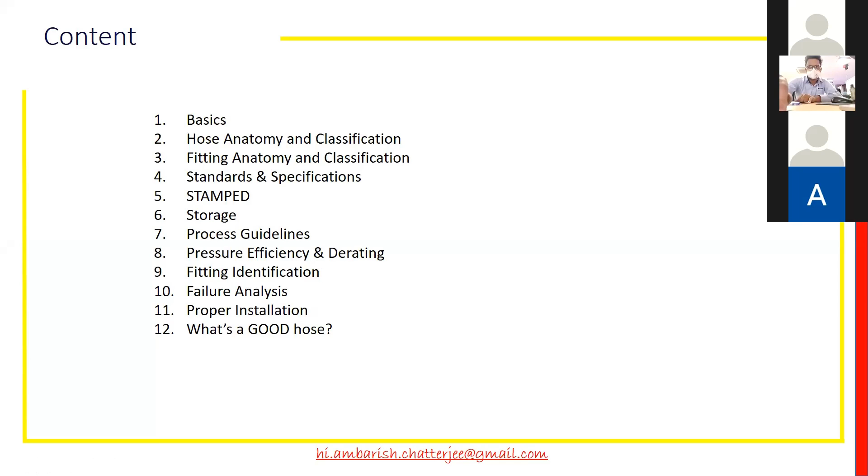Hose can be classified basically into two broad classifications. One is the fluid power hoses, which is used in hydraulic circuits and pneumatic circuits, and the other is the fluid transfer hoses, or generally known as industrial hoses, which includes air, water, chemical, steam, fuel dispensing, refueling, suction discharge, and all those. Now, in this session, we will focus on fluid power hoses, and to that extent, mainly hydraulic hoses.

First we go into the... is there some disturbance there? It seems so. Can everyone please mute yourself? Thank you. I would request every participant to please mute and to please participate actively in this. Thank you.

So first we go into the hose anatomy. What is there in the hose? Basically, there are three main components in a hose: one is the inner tube, the other is the outer cover, and the third is the reinforcement.

The inner tube should be resistant to the oil or whatever media is flowing through the hose. The outer cover should resist external aberrations like weather, fire, ozone, etc. And the reinforcement is the most important part of the hose. Not that others are not important, but this is the most important, because depending on what reinforcement is given, the pressure rating of the hose is determined.

Let me tell you, the tube and the cover do not contribute anything towards the pressure rating of the hose, the pressure withstanding capacity of the hose. So these are the three main components: inner tube, reinforcement, and outer cover.

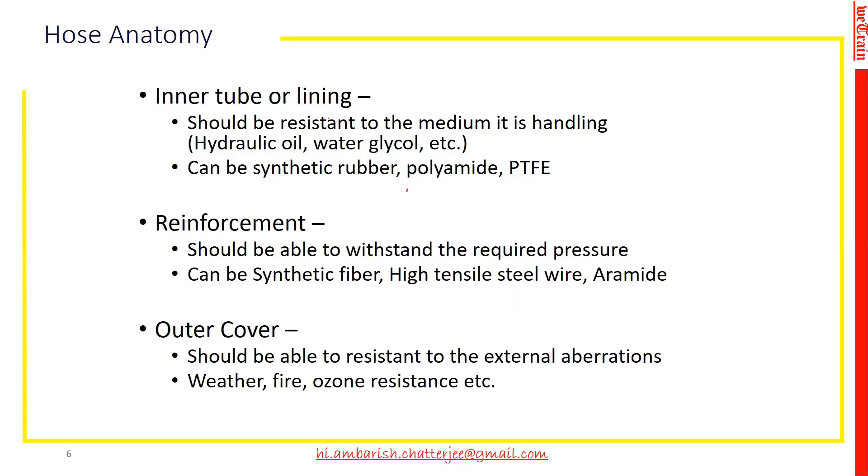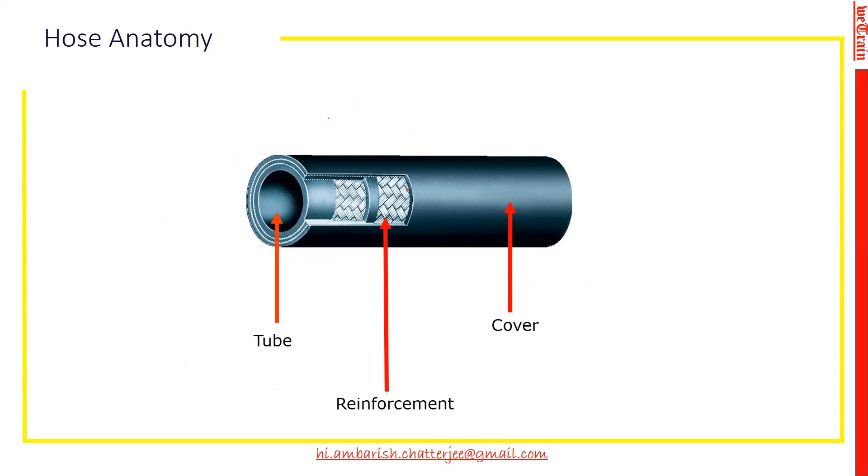There are others. Basically this is called the construction of the hose, where you have got three parts, and construction-wise, if you classify the hoses, then there are braided reinforcement, which is mainly meant for low and medium pressure, the spiral reinforcement, which is meant for high pressure, and helical reinforcement, where there's a helical wire embedded between the walls of the hose, which takes care of suction. During suction, there should not be any collapse in the hose. So this helical wire reinforcement takes care of the suction and discharge.

The third is fabric reinforcement, which is for very low pressure transfer hoses, mainly you can say the firefighting hoses and...

Sir, can you please get slow? Hello, sir, can you please explain in a slower way? Actually, we are not able to get it.

Okay, so I'll start again. Braided reinforcement is basically for withstanding lower and medium pressure hoses. Then as we go up in the pressure rating, we have spiral reinforcement.

The helical reinforcement has a helical wire embedded between the two layers of the hose, which prevents the collapse of the hose during suction. So in suction and discharge hoses, like oil suction and discharge hoses or suction line hoses, you get this helical wire reinforcement. Then you have fabric reinforcement, mainly meant for very low pressure hoses like oil hoses, or where there's no pressure and you just need to transfer fluid from one place to another.

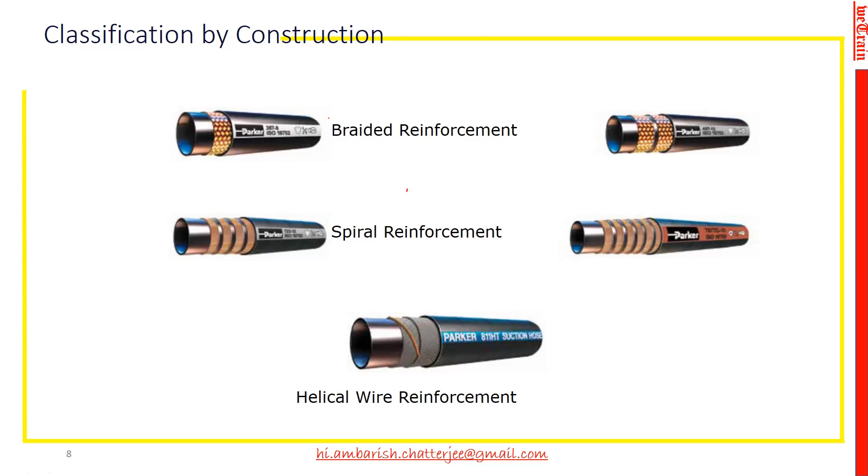Then if we classify hoses by material of construction, mostly in India, most hoses are rubber hoses made of synthetic rubbers, mainly nitrile or neoprene. Some hoses which need other parameters, like other mediums to flow, are made with EPDM and things like that.

Then we have thermoplastic hoses in two categories. One is the polyamide hoses, which are basically nylon. Nylon is the material for the inner tube and outer cover.

And then we have thermoplastic PTFE hoses. These are meant for very, very high temperature and also high pressures.

Then the next category is stainless steel corrugated hoses, which are meant to deliver fluid from one place to another where temperatures are very high, in the region of 800, 900 degrees centigrade. There we use stainless steel corrugated hoses.

And last but not least, the composite hoses. They are made of different materials to take care of specific needs, like offshore mooring hoses, which deliver oil or something similar from one place to another but have to float on seawater, like mooring hoses. So they are composite hoses.

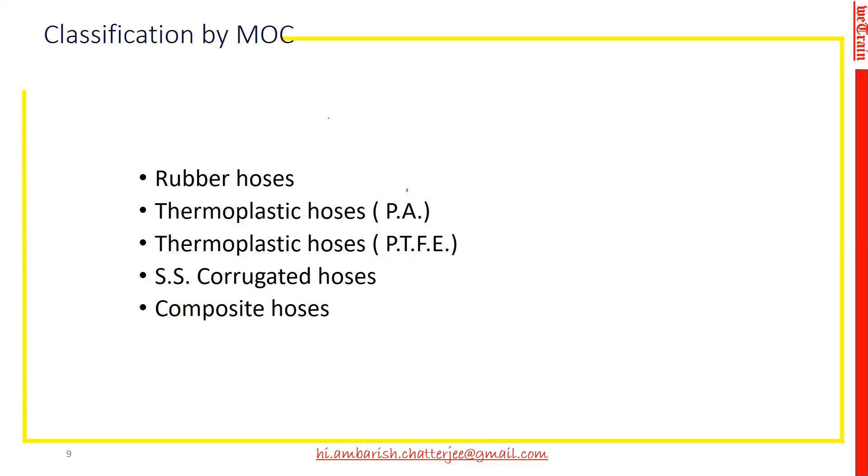We have put a small chart with the performance properties of the hose on the first column, and on the rows, the type of resistance for different materials of construction of hoses. Like chemical resistance: rubber hoses have limited chemical resistance, while thermoplastic PTFE is extremely good. These are hoses not really meant for excavator manufacturers like you, but some parameters like shelf life are relevant.

Shelf life: rubber hoses have a decent, fair shelf life, whereas thermoplastic hoses have extremely good shelf life. You can keep them for ages and nothing will happen to them. Then there are other parameters like abrasion resistance, thermal resistance, pressure resistance, and things like that associated with these hoses.

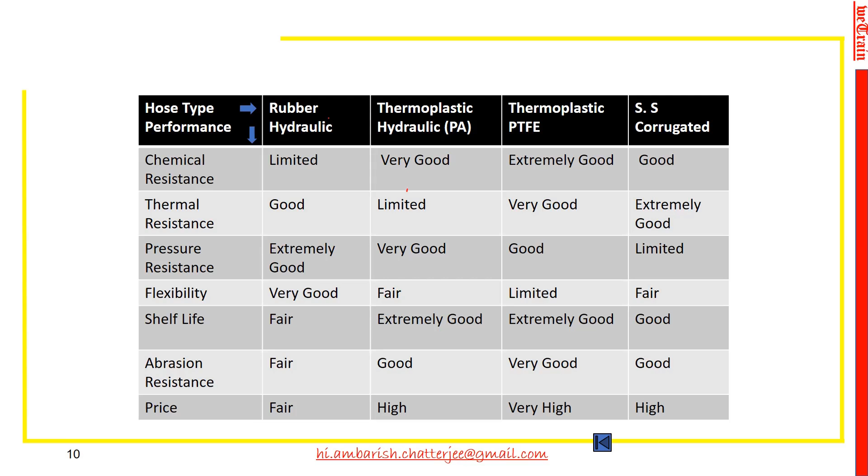Now we go to fittings. We'll just go over fitting anatomy. Largely, a hose fitting has three basic components. One is the stem, which you can call a stem, a nipple, or an insert, which goes inside the hose and gives support to the hose tube.

And then from outside, you have the shell or socket. There are many names used in India; they also call it a ferrule. That goes over the hose, and then this socket is crimped onto the hose and nipple together to form a permanent hose assembly. I'll go into further details.

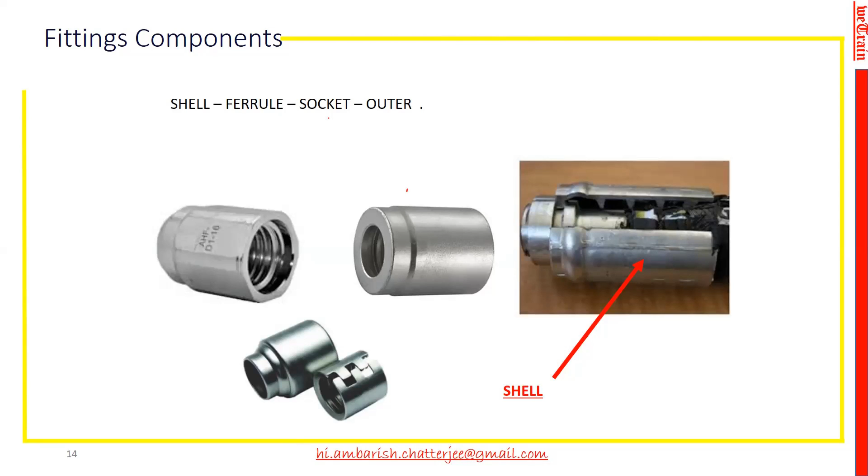These are the typical shell, ferrule, socket, or outer. In different places in India, they are called differently. Some people call it a cap, and especially in Gujarat, people call it outer. So this is the shell which comes over the hose.

The next is the nipple. The tail of the nipple goes inside the hose, and the head of the nipple is as per the customer's or user's requirement. These are called nipple, nozzle, inner, and things like that.

Then you've got the nut, which is called nut in all the languages, whether it's Bengali, Gujarati, Marathi, English, whatever it is. So this is the nut, which is basically the third component of the hose.

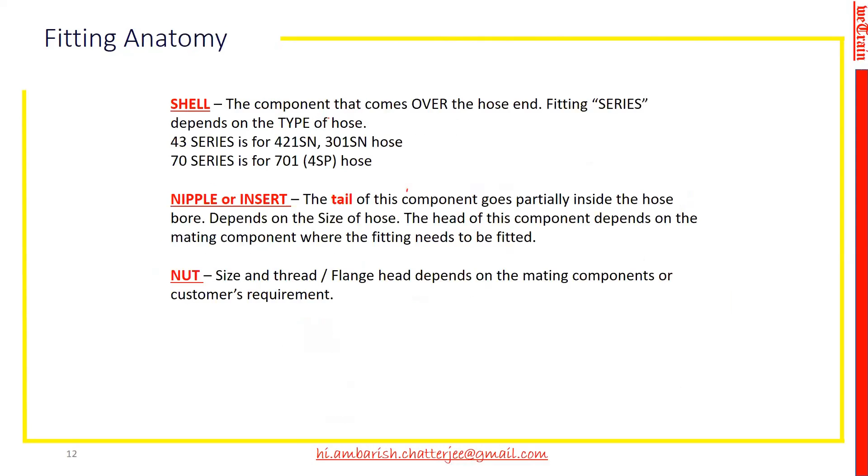Now we go into a little bit of fitting classification. These are the two main types of classification. One is the permanently attached fittings, which are also generally called crimp fitting or swage fitting. And there are some permanently attached fittings which are built-in fittings, built into the hose when it is made. So they are permanently attached; you cannot take out the fitting. If there's some problem with the fitting, or if there is a leakage between the hose and the fitting, these have to be scrapped.

The other variety is reusable, as the name suggests, and it can be attached in the field. That's why it is known as field attachable fittings. So there you've got screwed-on fittings, then you've got bolt-on fittings.

Screwed-on fitting, you'll see if you go to a petrol pump. Beg your pardon? Hello. You want me to go a little slower? Can you hear me? Can you continue, please?

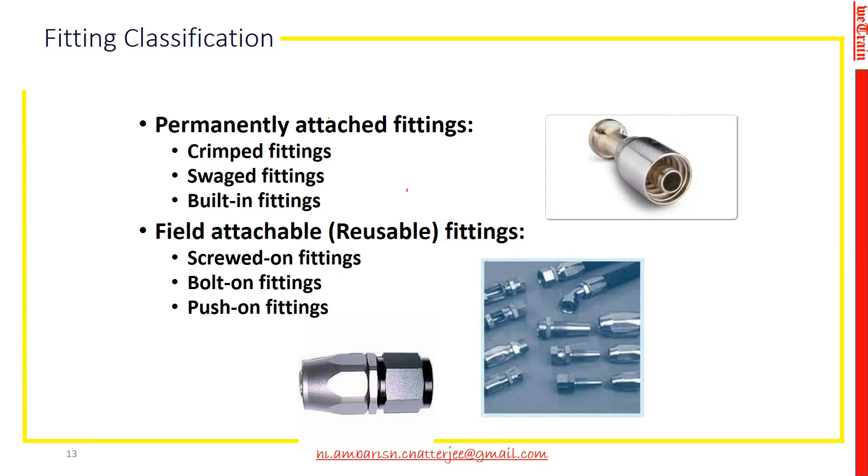Now, in any fitting, there is a tail portion which goes inside the hose, and a head portion which gets attached to, it can be a motor port or a manifold port or something like that. So this head side of the fitting depends on what the user requires.

So depending on the head side of the fitting, we have got different types of heads, like an inverted flare seat or a flat seat or a flange for very high pressure hoses using spiral hoses. You have flange, and then there are staple lock fittings and all.

Each fitting also has nuts, and there you have got different threads. Depending on the country of origin, you have got BSP thread, UNF thread, metric thread, and so on. These are the main 3 threads which are used in hose fittings.

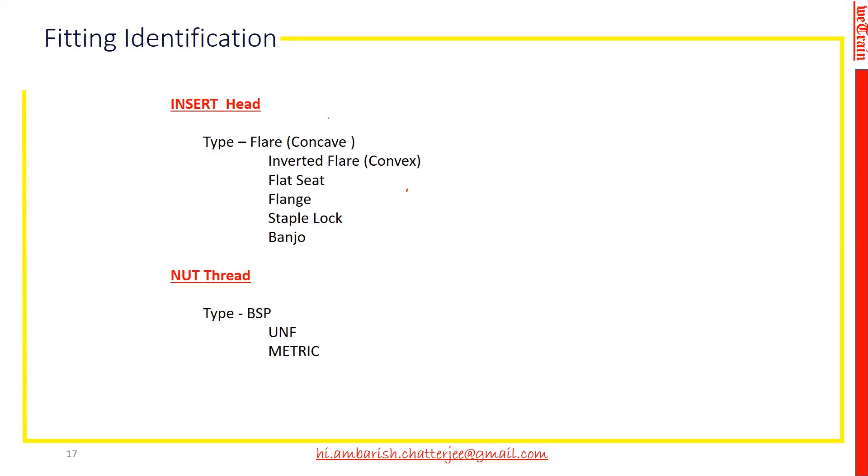Now we go to the hose standards and specifications. This is a very important chapter for anyone who is making hoses or hose assemblies or using hose assemblies. So one should know what the standards and specifications are, what their origin is, and where they stand at the moment.

So the equipment which originated from America used to have the SAE standard, which has got standard numbers like SAE 100 R1, 100 R2, and so on up to 100 R19. Each and every specification, standard, and substandard has its own different construction and different pressure rating. Similarly, the Germans had the DIN specification, which used to have 1 SN, 2 SN, and then for spirals, 4 SP and 4 SH.

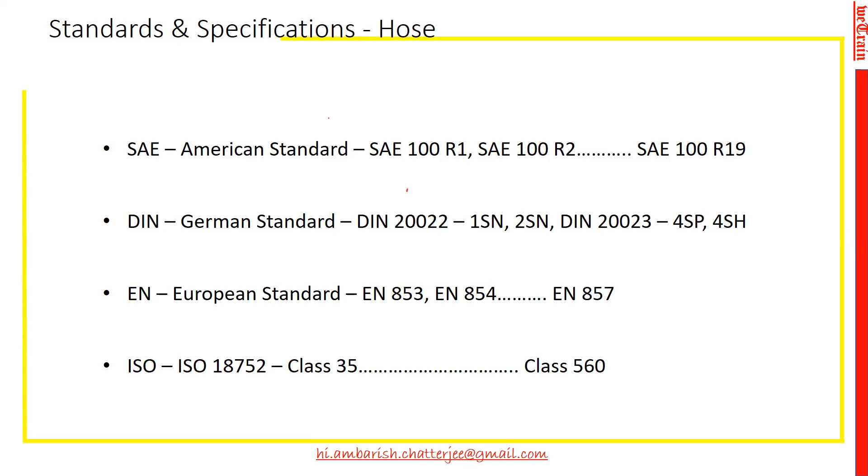Then other European countries had EN 853, 854, and so on. But now ISO, the International Standard Organization, has sort of clubbed up all the other standards to make an international standard. This is the standard which is going to be used here in India. It has already started trickling down in India, but in another 2-3 years, this will be the standard everyone uses. I'll go into a little detail on the standards.

This is the SAE standard. The governing standard for hoses is J517, and this gives the general dimension and performance of a particular substandard, that is the 100 R1, R2, R3, and so on.

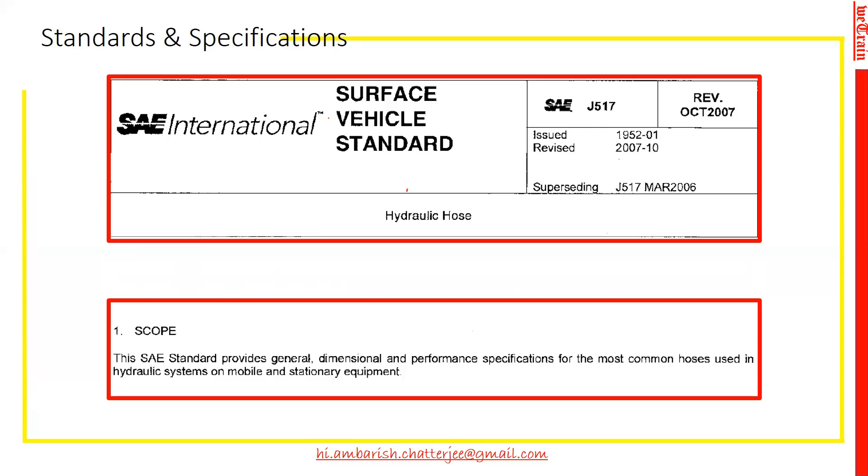There are associated standards with SAE J517, which are SAE J343. All the tests conducted are as per stipulations in SAE J343, for example, a proof test, a pressure impulse test, or a change in length test - all described in this standard. Especially quality control people in your organization must be conversant with it. If not, they should have a copy and understand how the tests are conducted and per what stipulated conditions.

Then the other associated specifications are 516, which is a hose fitting specification, and J1273, a very important specification recommending good practices - how to store a hose, how to use a hose, how the routing should be, and things like that. This is another very important standard which should be handy with users like Hyundai.

The other associated standards are given here, just to show that there are other standards associated with it. I've taken just a few of them to show that, associated with J517, these are the standards referred to in J517 also.

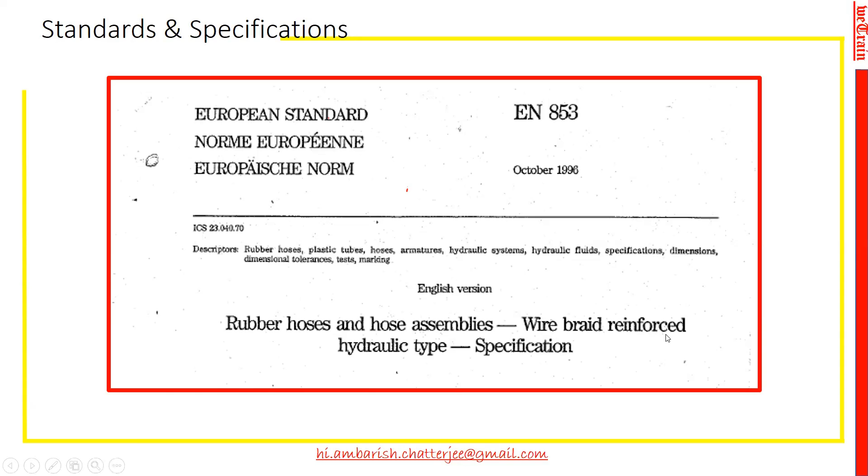So this was the American standards. Now we go to the EN standard, European norm standards, which basically earlier were British standard, German standard, French standards and all. These EN standards have been compiled, and for each construction of hose, they have come up with EN 853, EN 854, and things like that. For example, the one on screen is rubber hoses and hose assemblies with wire reinforced hydraulic type. The other standard is spiral reinforced rubber cover hoses, which has a different standard number.

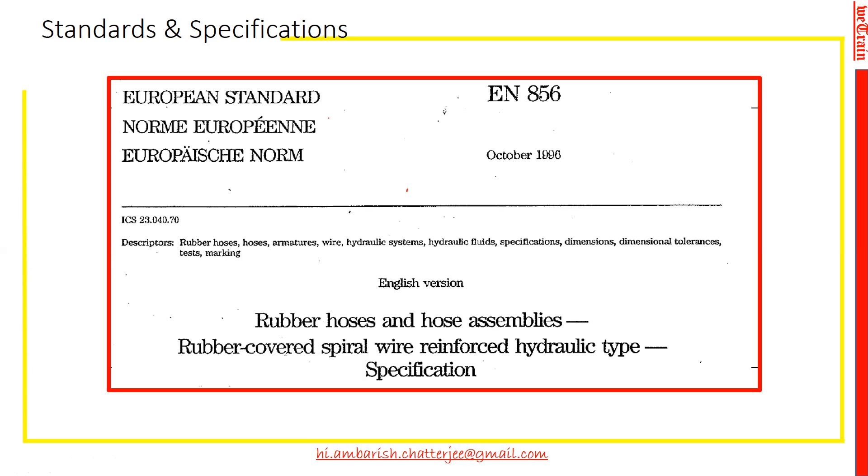So these are, you can say, the European standards and the SAE standard, the American standard. They are quite alike each other in most respects, apart from a little bit here and there - the pressures, the temperatures, the bend radii, and all those things.

In American J517, which we call R1 - I've shown this on the screen - this standard gives you the OD of the hose, the ID of the hose, the cover thickness, and the maximum working pressure. The last column is a very important one, which is the minimum bend radius.

For each size of, say, R1 hose, there is an associated minimum bend radius. This bend radius is one of the measures of the flexibility of a hose. The instruction is you should not bend the hose below this radius - when you bend the hose, it should not go below this minimum bend radius, known as MBR in short. With each size, you have a minimum bend radius for the hose. This is also a very important parameter, along with the maximum working pressure and all those.

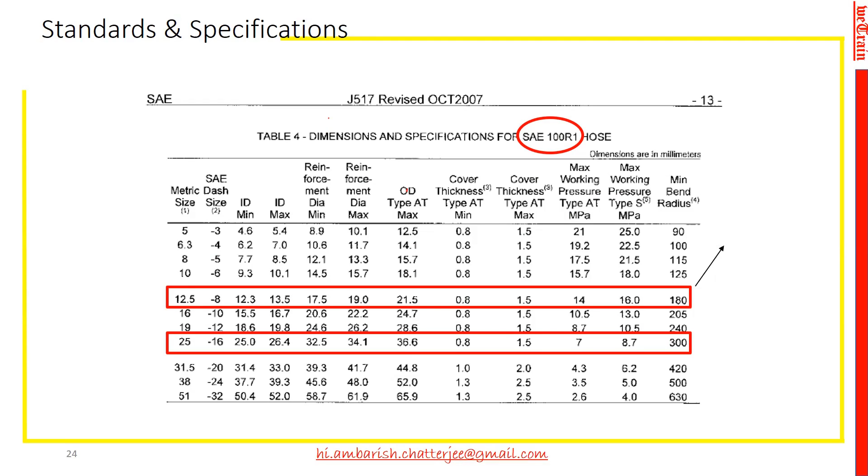Many of you know what the impulse cycle is, but for those who aren't aware, it's sort of an analogy to the life of the hose. There is an impulse test machine in any good hose manufacturer's test lab, and what they do is put the hose assembly with the fitting in the impulse machine. As per SAE J343, there is a specified impulse cycle - the pressure goes up at a particular rate of increase, then stays at a higher pressure, and then drops down.

So this entire cycle is known as one impulse cycle. The hose assemblies are subjected to several impulse cycles, and then it is found out how much of an impulse cycle it can withstand.

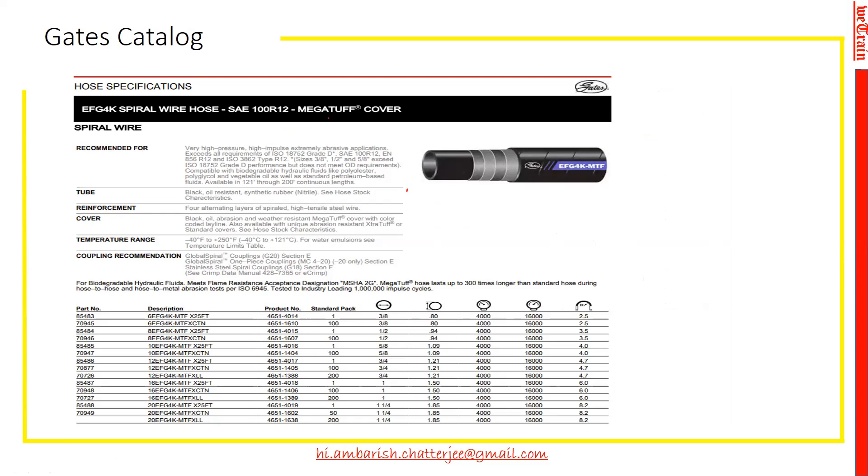So now going back to the SAE specification, which is very widely used in India today, if you see on the left-hand side column: R1, R2, R3, R4, R6, R7, R8, and so on. Initially when this standard was formed, they specified a certain construction of the hose. For example, R1 was one layer of high tensile steel wire braid. R2 has got two layers of high tensile steel wire.

Then comes R3. It's not three layers, it's a random number, you can say. R3 is two layers of textile wire. R4 is a helical steel embedded wire hose. Then R6 is one layer of textile, so you see the pressures are very low compared to R1 and R2.

Now, initially they specified the construction of the hose. That's why you'll see with the same construction, if you take R1 right at the top, as the size goes up towards the right-hand side, the pressure rating goes down. Same thing in R2 - as the size goes up, the pressure rating comes down.

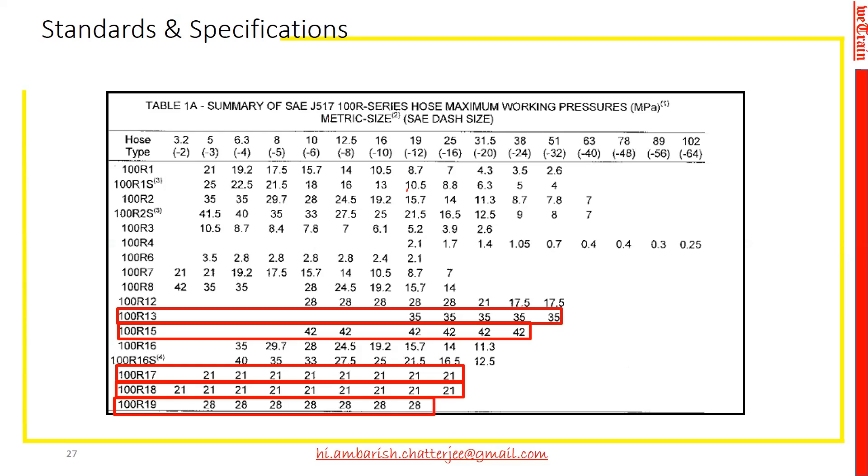So why don't we have an international specification which is much simplified, and then everywhere in the world it is this specification used. This is the... sorry, I keep on drinking water, so a little bit of a pause.

So if you see this ISO 18752, this is the specification which is coming, or rather has come to India to an extent, but not fully. But within the next couple of years, for sure, this will be the specification everyone will follow. So if you have started following the specification, good. If you have not, I would recommend you start using this specification and get used to it by the time it comes fully to India.

The simplicity of the specification is very simple. You have got a class of hose, a grade of hose, and a type of hose. The class of hose is whatever the system pressure is - if it is 280 bars, all the sizes in class 280 will have 280 bar pressure. Very simple. You don't have to really go in for whether it is R2 or EN 853, 854. The construction is totally left to the manufacturer, and you got to maintain a constant pressure across the size. These are called the isobaric pressures, isobaric hoses.

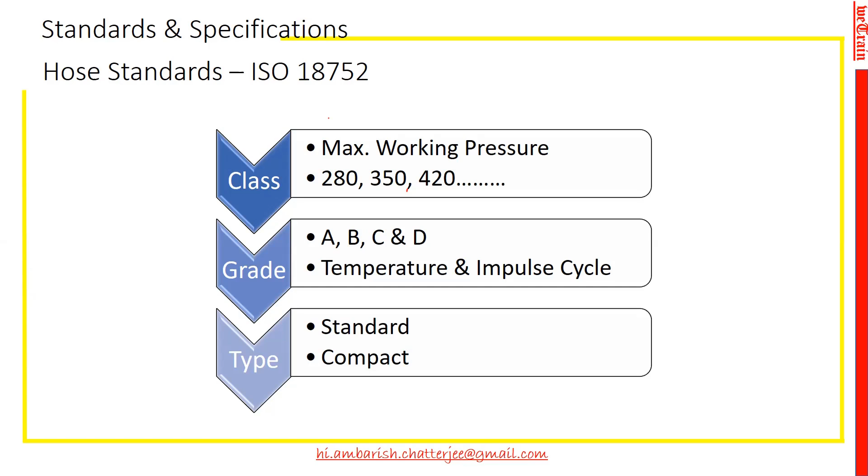Going into a little bit more detail, on the top row you have got the class of the hose - 35, 70, 140, and so on up to 560. So once you call it a class 350 hose, across the sizes of the hose, you will have the same pressure. You don't have to really switch between R1 for 3/8 inch, R2 for ½ inch, and 4SP for 5/8 inch, and things like that. You can have the same class of hose in a hydraulic system, which will maintain the same pressure. I think it's clear from this.

Now, apart from size, apart from class, each class will have a grade A, B, C, and D. Now look at the temperature and the minimum number of cycles. A class 350 hose, grade A, will have a maximum temperature of 100 degrees centigrade and a minimum number of cycles of 200,000, that is 2 lakh cycles. So it has to survive 2 lakh cycles in impulse testing. Similarly, if you go to grade B, the only change is the number of cycles, that is 5 lakh cycles. Other things are the same, that is the temperatures are the same.

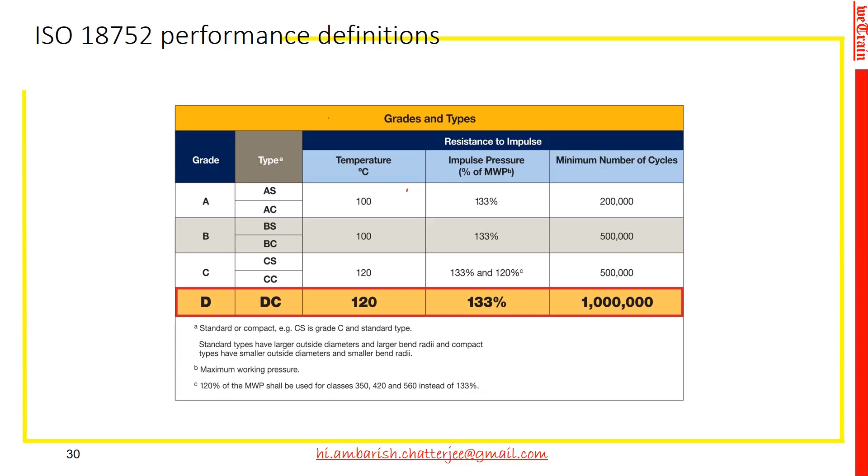With the standard and specification, we have this where for the same generic hose R1, which is equivalent to 853 1SN, all the manufacturers, the different brands, have got different model codes. So Gates will call it G1 or CR1 or AGR1. Parker will call it 421 SN, 422, 482, 426, and things like that. Alfagomma will have a different name.

Now within this, you may ask, okay, Eaton has got, for R1 only, 3 grades. These 3 grades all meet the stipulated pressure and minimum bend radius requirement of R1, but they have got something special also. That's why they have got different model codes for one single specification. So for R1, you have got, for example, Parker 421 SN, 422 SN.

The difference is between the inner tube of the hose, which R1 and R2, 421 and 422, have got the same pressure rating, same bend radius, but they are meant for a little different application. For example, 422 is required for a much more volatile hydraulic oil as compared to 421.

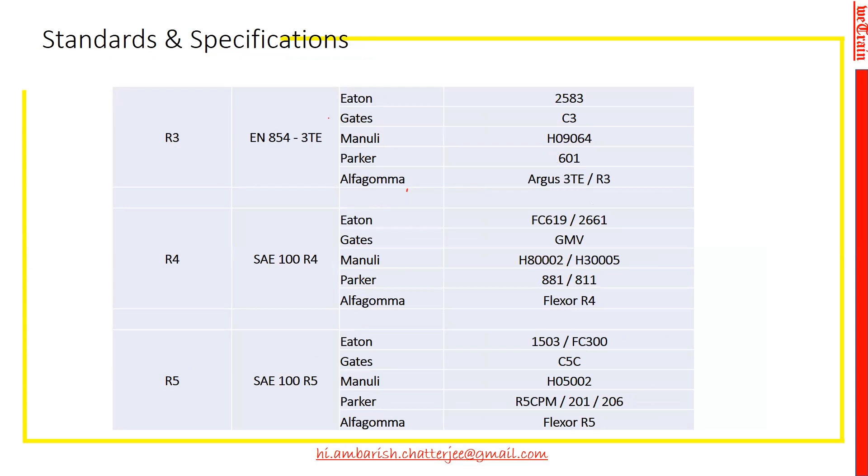So this is basically a table which has been made for all R1s, R2, R3, R4. Different companies, different brands, different corporates have got their different part numbers or model codes. It's a long list going up to 4SP, 4SH and all.

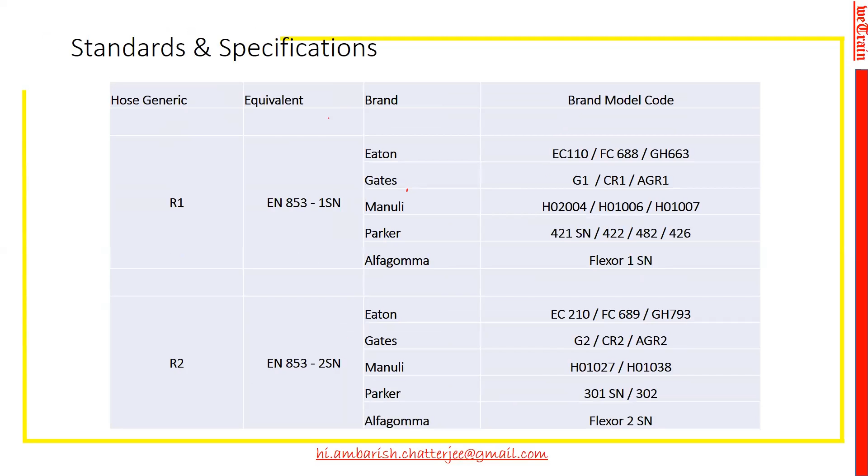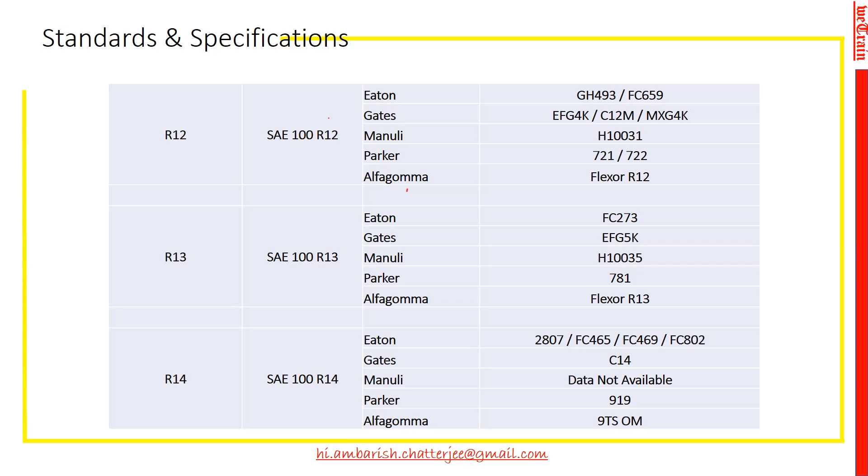So now we come into fitting standards and specifications. Like hose, fittings also have standards. And in India, the technology has come from different parts of the world, and every country uses their own fittings, their own standard of hose and all those things. So ISO, the International Standard Organization, tried to normalize this. We'll come to that.

Before that, we'll go into the fitting standards. International standards are there: SAE, DIN, JIC which is also American. BS is British standard, and then finally we have got something in ISO also.

Now there are OEMs who have made their own standard, taken one of the existing standards and then modified it technically and to suit their purpose commercially also. So some OEMs like Caterpillar, Komatsu, have got their own standards.

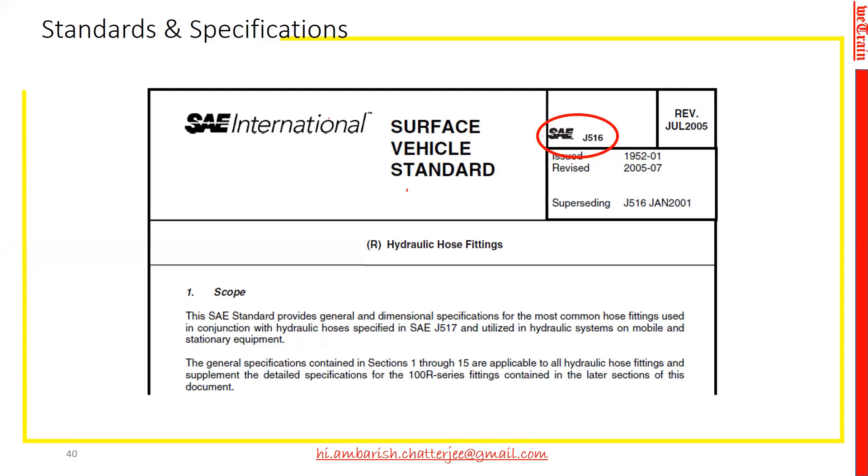SAE has got J516 for fittings, which is their main standard. There are other associated standards which are offshoots of this J516, like J518, and 1453. There are so many of them, but we'll go to the most relevant standard now, so we're not going into details of J516 at the moment.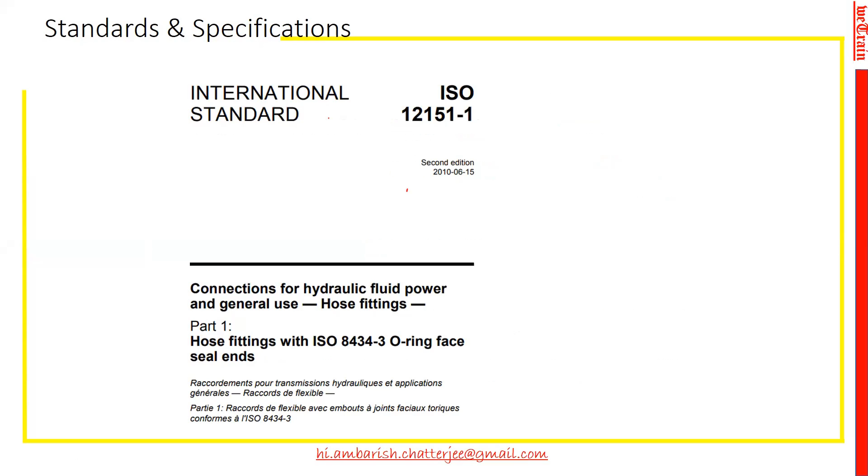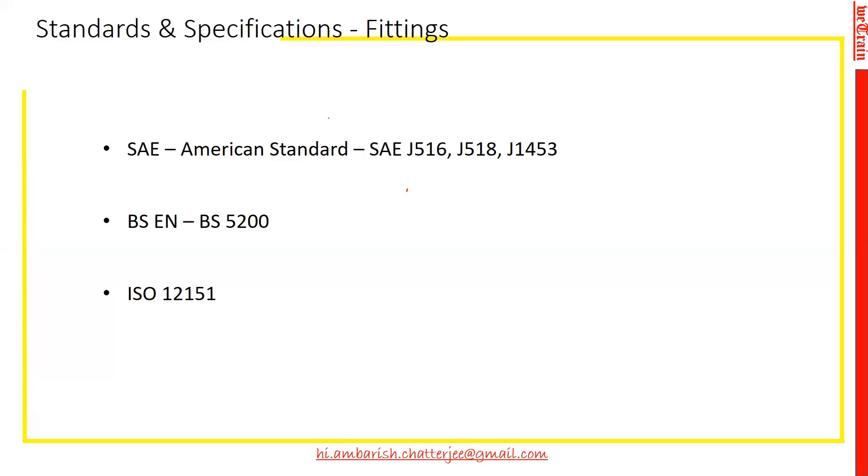This is the standard which is the international standard, ISO 12151-1. I will go into the details of SAE standard for fittings, which is J516, 518, 1453, and so on. BSEN, even now many OEMs who had the original equipment from the British use this BS5200. But the final standard I was telling you is ISO 12151.

ISO 12151 has got 6 parts. You can note this down if you are not already conversant with this. Part 1 deals with the O-ring face seal couplings, known as ORFS coupling. Part 2 is the metric coupling, basically the German coupling, which has got a 24-degree cone seat. Part 3 deals with flanges and split flanges of both varieties, 3000 psi and 6000 psi.

Part 4 is not the one very frequently used in hose assemblies. Part 5 is very important, JIC, an American standard which has got a 37-degree cone seat. BSP is the British standard, which has got a 60-degree cone seat. We'll go into a little detail of the standard, how to identify these.

So here you can identify the fitting. You can see this is a JIC. It has got a 74-degree flare, or 37-degree on each side. The thread used in JIC standard is UNF thread, and the female side is an inside flare, and the male...

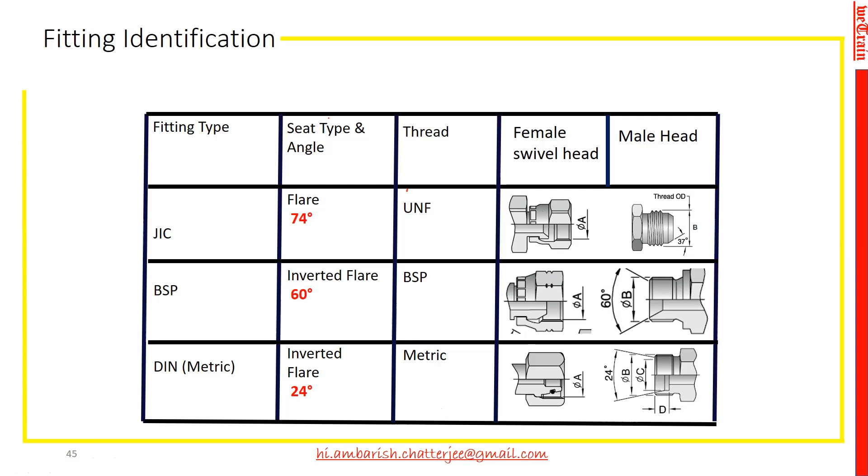Similarly, DIN metric, this is how you identify the fittings, and the threads are there. Now we go to ORFS, O-ring face seal. This has got a flat seat and thread is UNF thread. Female looks like this and the male head is like this. So flange has no thread, it's a flat seat, and there's a split flange which is used to bolt two flanges adjacent to each other.

Similarly, JIS is a Japanese standard which has got a 60-degree flare, that is a concave seat in the female fitting, but JIS has got both metric as well as BSP. So some of the Japanese use BSP, some of the Japanese use metric.

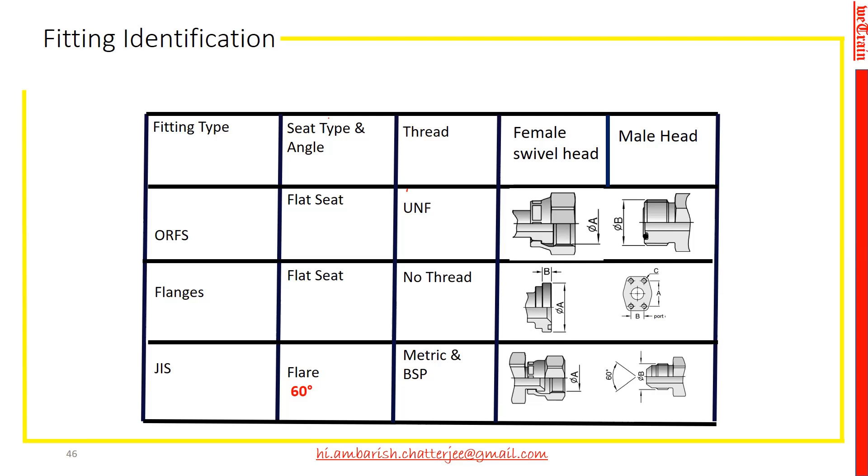Since this session is an overview, I'm not going into the details of each and every one. Maybe on a full day session on some other occasion, we can go into much more detail - how to identify fittings, what are the pressure ratings of the fittings, what torque is required to be applied on these different types of fittings, and so on.

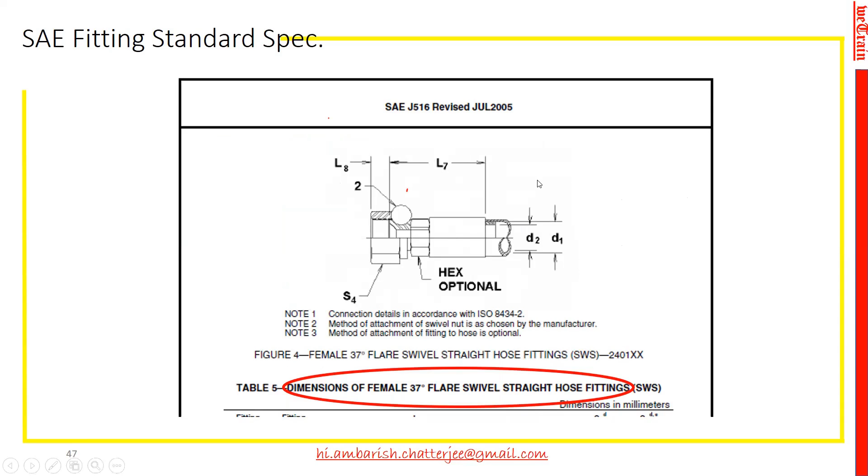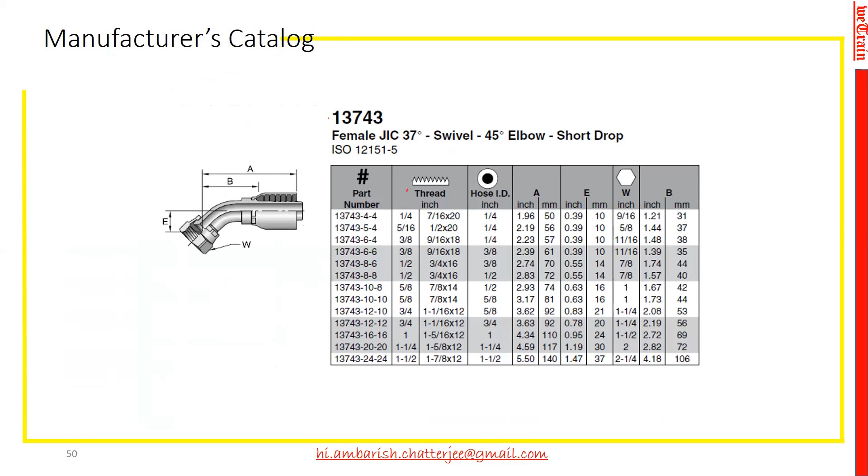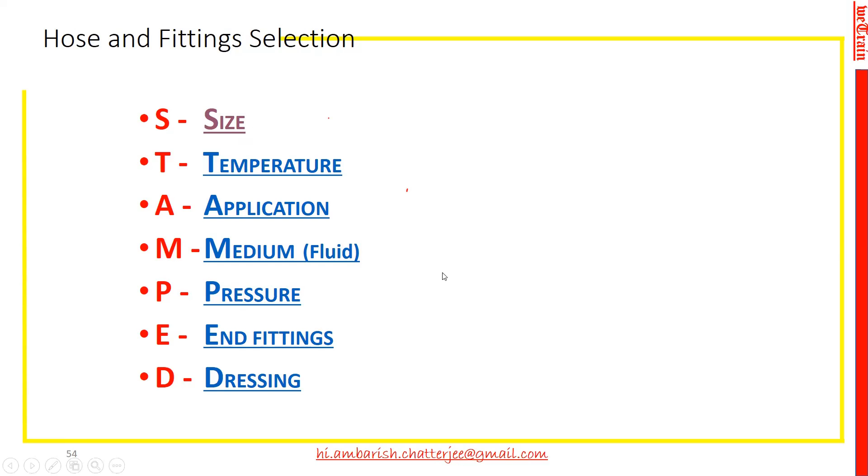Now we come to a very important thing - how, when you are buying your hose assembly from someone, or when you are describing your hose assembly, this word STAMPED is very important, used by most global hose manufacturers, and each letter has significance - all very important to understand. S is for size, T for temperature, A for application, M for medium, P for pressure, E for end fitting, and D for dressing. This depicts the entire hose assembly. Anything which is missing means you have not done full justice to the hose assembly.

Now, size. In hoses, there used to be different designations from different countries - half-inch designation, 12.5, NB 12.5, NB 12, NB 13, and things like that. Finally, the globally acceptable size description is by dash size. For example, dash 10. Now what is dash 10? Any dash number is equivalent to 1/16 of an inch. So a dash 10 is 10/16, or 5/8.

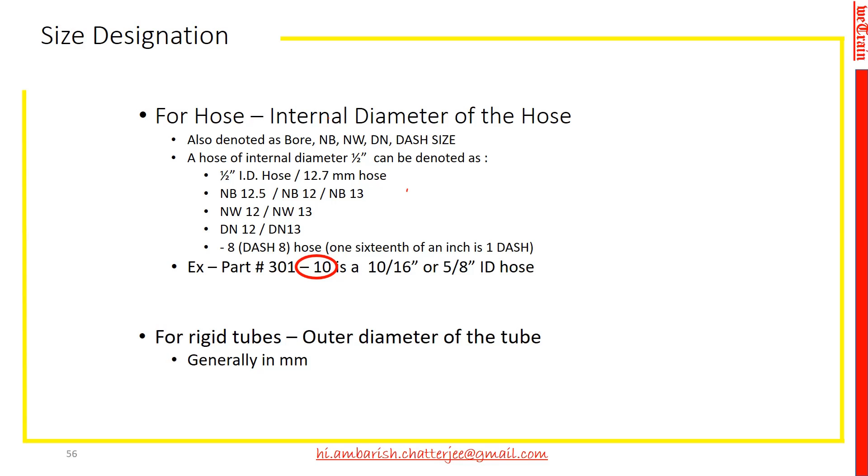So all these hoses and fittings are now described in terms of dash sizes - no longer this NW and DN and NB and things like that. So a dash 16 is basically a 1-inch ID hose. Dash 12 is a 3/4 inch ID. You divide the dash size by 16 and then you get it in inches.

Now, this is mainly for the designers - I don't know, some design people must also be sitting there, and we can talk on this for hours. But since it's just an overview, the size of the hose is basically governed by this parameter: maximum recommended velocity in feet per second. For a return line hose, it is 10 feet per second. For a suction line hose, it is 4 feet per second. And for a pressure line hose, it's 20 feet per second.

Beyond this, if you go, say for example to 25 feet per second in a pressure line hose, there'll be a lot of heat generation, a possibility of cavitation, and so many other problems. So these are the recommended maximum velocities. One should be very careful about these recommended parameters while designing and arriving at the size of the hose. We have a nomograph for this, which is very simple.

On the left there are three vertical lines. The left line is the flow of the fluid, and the last line is the inverse scale - so from up to down, the velocity is increasing. This is the velocity scale, and the first one is the flow scale. Now, depending on the flow which you know for your machine, you draw a line to cut the maximum recommended velocity of, say, the pressure line. Wherever it intersects the middle line, that is the size of the hose.

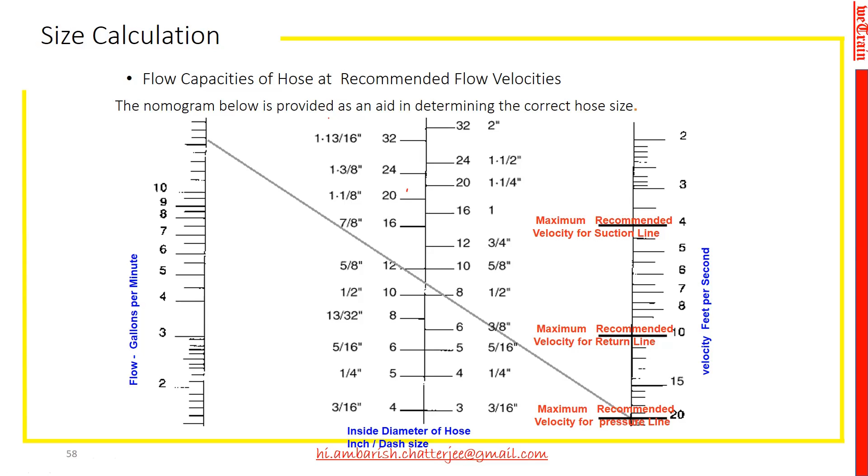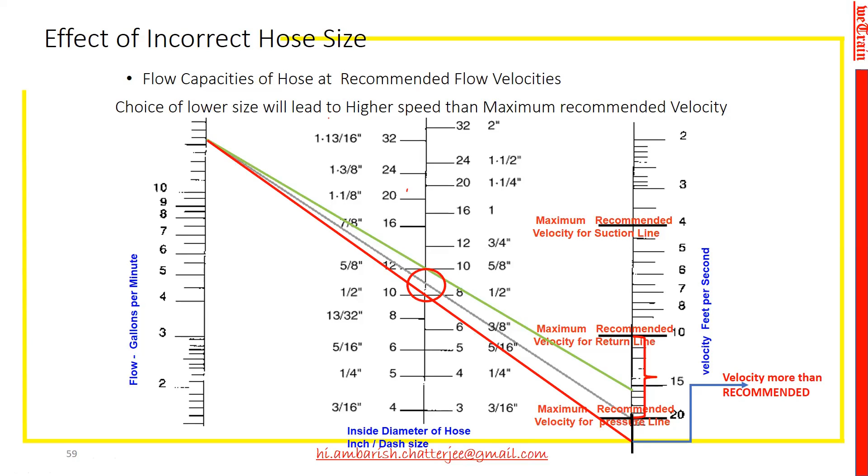Now we come to the STAMP temperature, T for temperature. This is the general rubber hose temperature range.

Now this temperature, mind you, many people, especially in the process industry like steel plants and aluminum plants, always think the temperature we talk about is the ambient temperature. Sometimes they ask us, our temperature here is very high, give us a high temperature hose. But the thing is, it's not the outer temperature, not the ambient temperature. It is the fluid temperature which we talk about here.

So for petroleum-based fluid, the general rubber hoses, which are standard hoses, not high temperature hoses, range from minus 40 degrees centigrade to plus 100 degrees centigrade. Now some people think, if petroleum itself goes up to 100 degrees, why can't we transfer water at that temperature?

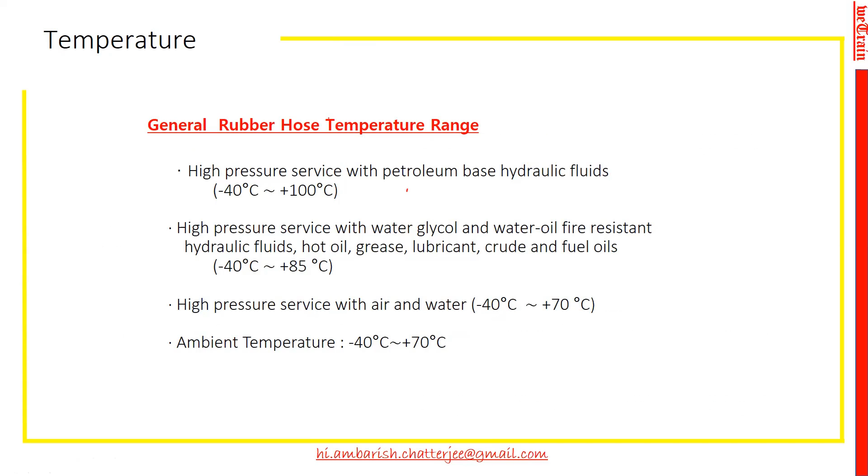So this has to be kept in mind, and then you use a hose manufacturer's catalog to find out which hose gives you how much pressure for which medium.

Then in the STAMP word, we come to ST, we have completed size and temperature, now we come to application. A particular hose which can give a very good life in a standard static application with normal temperatures, not much surge in pressure, but depending on the application, this varies.

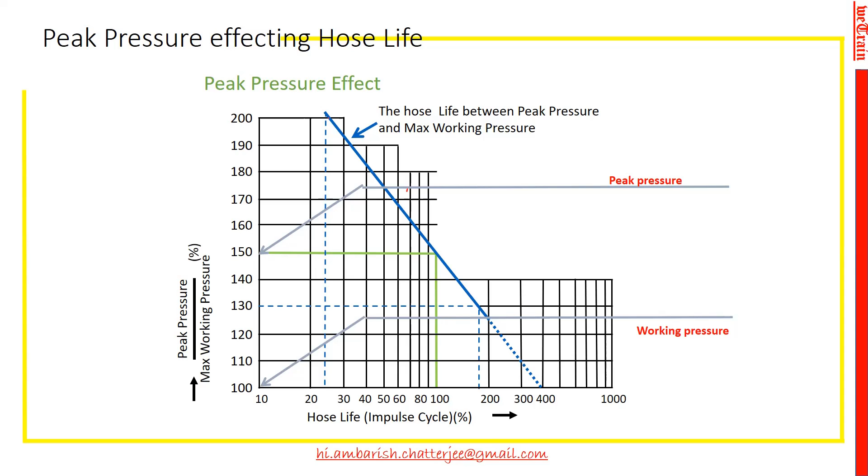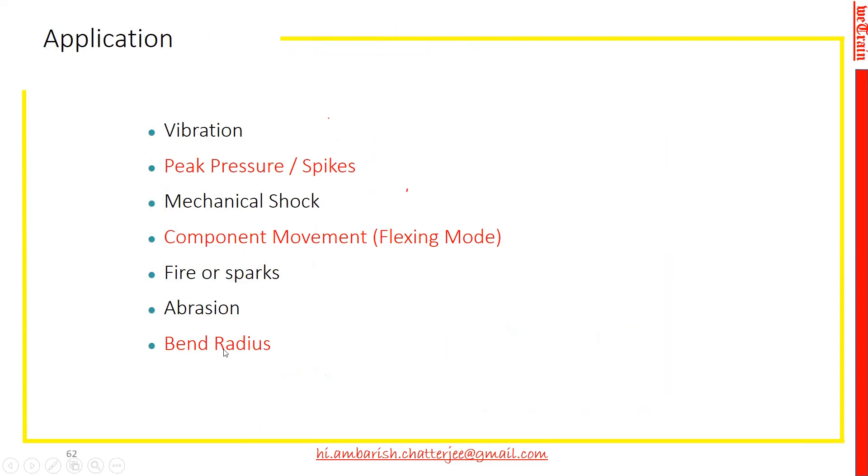The third factor is the bend radius. How much do you bend? If you go to the application factors - vibration, mechanical shock, fire, spark, abrasion, and all - we are taking three main factors here. Now this is the bend radius factor. If you bend it as per your recommended bend radius, you get say 100% life, or we take it as 90-95% life, something like that.

That's why you'll find in the catalogs of global hose manufacturers that they say our hose is a half bend radius hose - that even if you bend it to half the recommended bend radius in the standard specification, they will give a full life. So they stretch the life up to here. So if it is a standard hose, you have to be very careful about the bend radius factor and design your entire circuit accordingly.

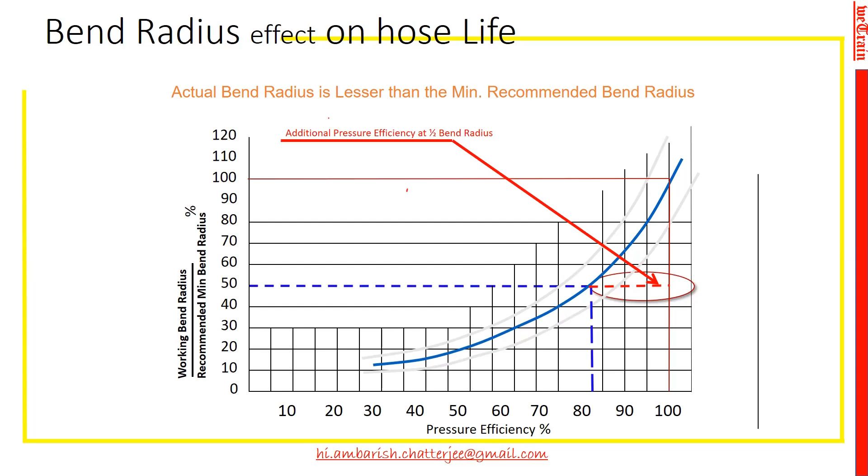Then comes, after STAMP, M is the fluid medium. Like I was telling you, the fluid medium is very important for selection of hose. When I was telling you that for R1 some people have 2, 3, 4 varieties of hoses, for R2 some manufacturers have 2, 3, 4 varieties of hoses - this is because of the change in medium, change in application. So medium plays a very vital role.

So for your ordinary, most used ISO 68 grade oil or even 46 grade oil, you can have a standard hose. But if it is for something else, even the eco-friendly fuels nowadays which are used to quite an extent, you require something special, which you can get from a different variety of hose from the same subgroup.

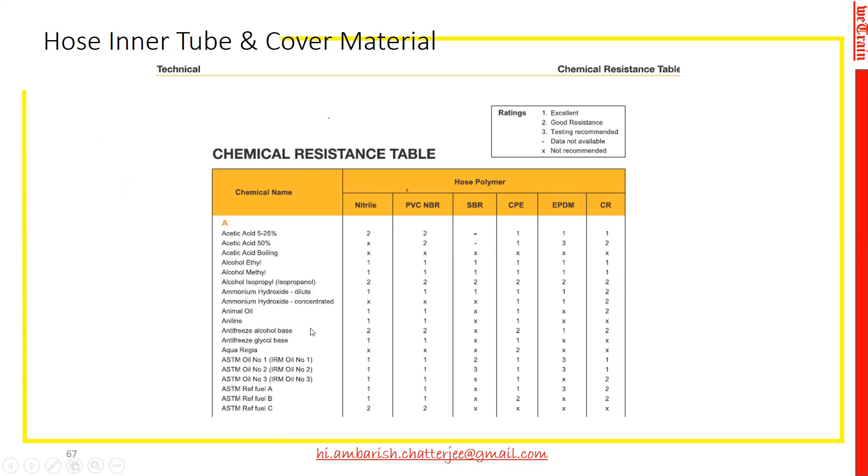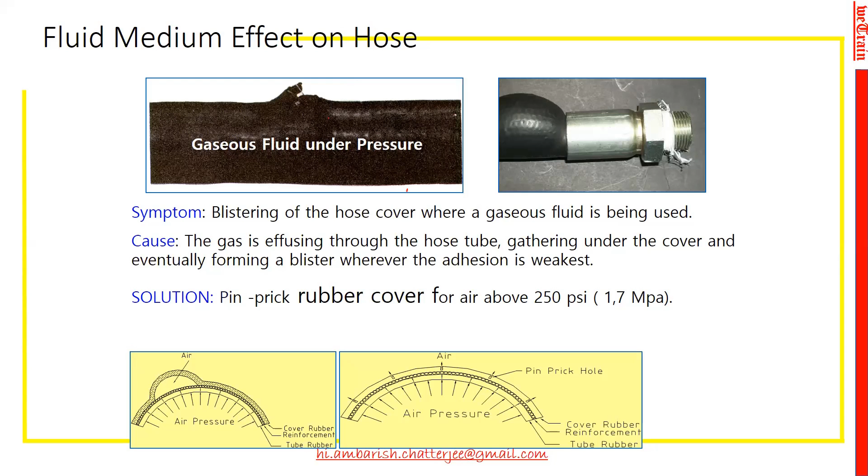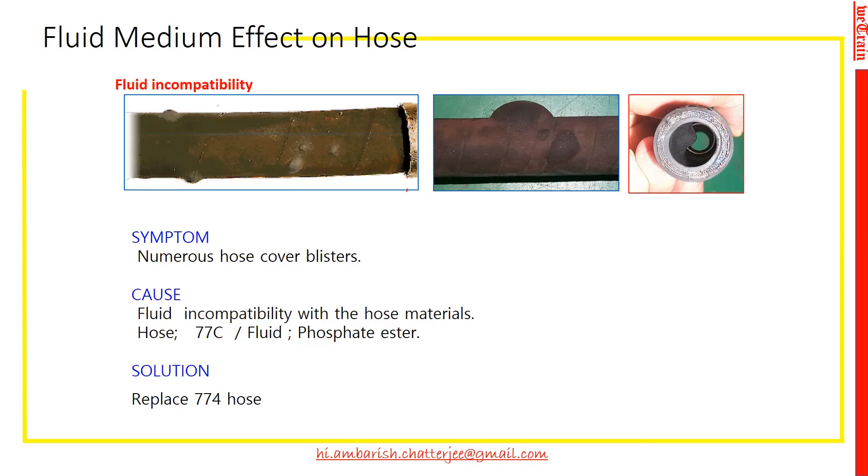If you do not use the right one - we have shown an example of a fluid medium which is a little more volatile than usual, or where some gaseous fluids are used - you will see some blisters coming out on the surface of the hose, because of improper fluid medium used for a hose, or improper hose used for a fluid medium. This sort of blister happens if the fluid is incompatible with the hose material. Here it's written phosphate ester is the material, so it is giving this sort of blister.

Now come to the STAMP, pressure. There are many names of pressure. One is the maximum operating pressure - this is the pressure you can call the pressure rating of the hose, because the manufacturer specifies this pressure as the operating pressure or working pressure, whatever it is.

The design pressure is known as the burst pressure. The hydraulic hose is designed at 4 times the operating pressure, or the design pressure is 4 times the recommended pressure. So the pressure at which it is designed is known as the burst pressure divided by 4, and that becomes the recommended operating pressure.

Now there are other pressures which are used in the impulse cycle. The pressure is different, which is given in the specification. Proof pressure is generally 2 times the maximum operating pressure, at which you can test all your hose assemblies if you want to.

And then in the pressure, we would like to mention there is a thing called pressure drop, which everyone is aware of. This depends on the hose, fluid, temperature of the fluid, hose size, flow rate, and all these factors. So pressure drop has to be kept in mind while designing your hose, especially in applications where the hoses are very long.

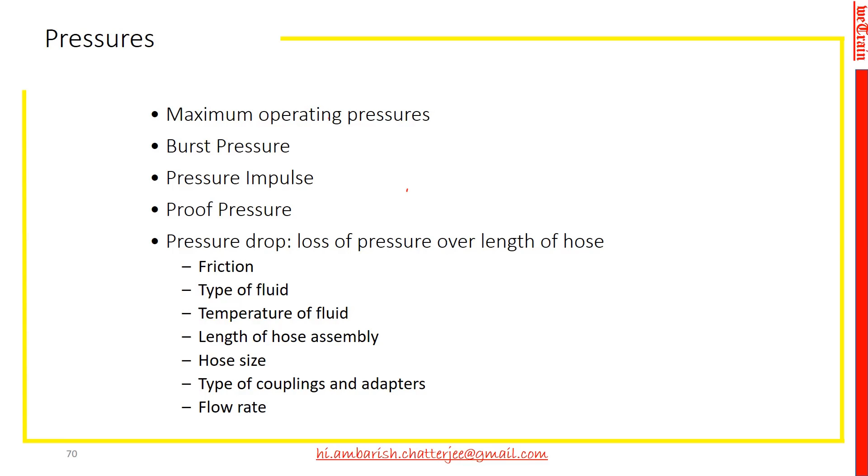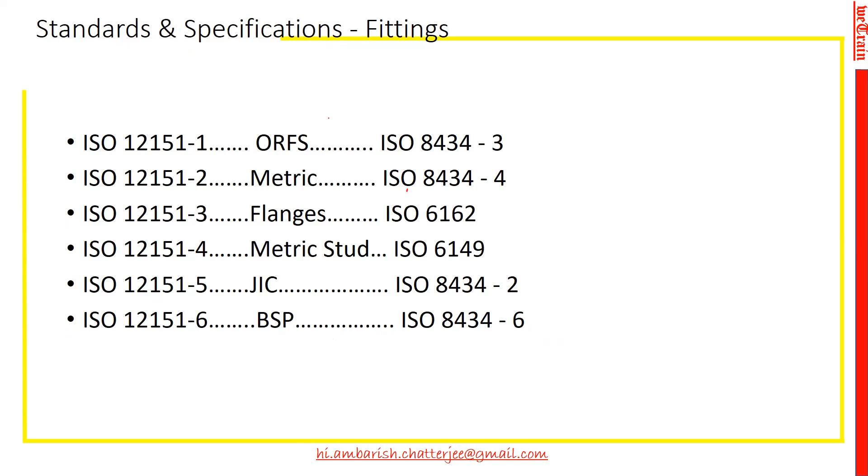And that's why in practice, whenever we were asked when should we replace the hose, we always tell them that you have to replace the hose. If it is not a very critical application, you can take it up to 2 years - after 2 years you should replace the hose. You should check whether the hose has developed any cracks. If there is any crack, you should not use it. If there are no cracks, then probably you should test it at a proof pressure level, and then you can use it.

So 10 years on paper is written, but that is ideal condition, and there are so many factors involved - ultraviolet light is one thing. So many hoses lie in conditions where nobody can store a hose in a cool, dry place, which is generally written like on a medicine bottle or something like that. So these are the storage considerations.

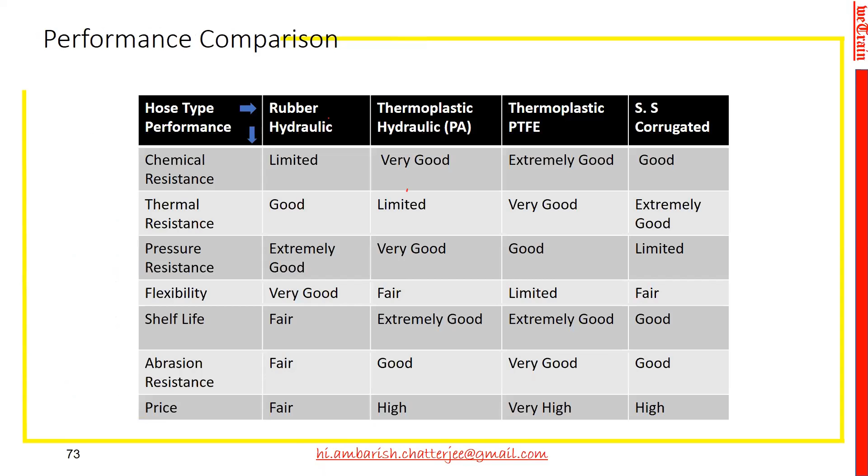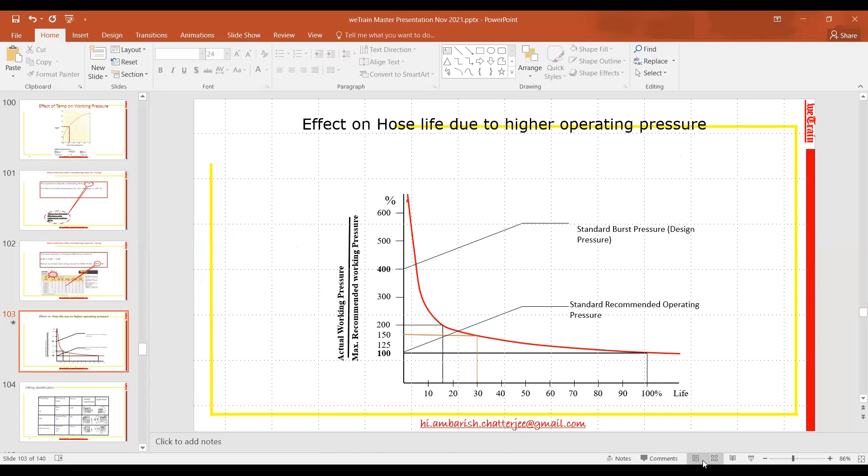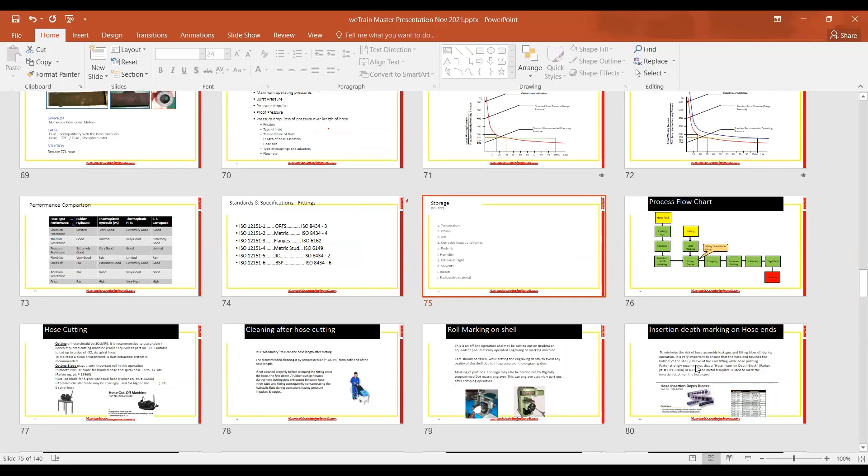There's a slide on what are the dressings, which in your case is not applicable to that extent. Yeah, you use in your vehicles, you must be using the anti-abrasion sleeves or heat sleeves. You may be using heat sleeves on the hose, which are very near to your radiators or engine, or touching the engine and things like that. So that completes STAMPED.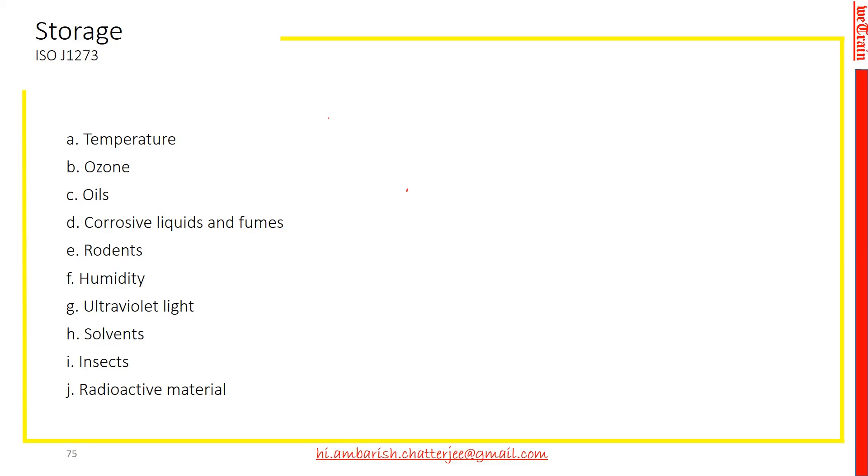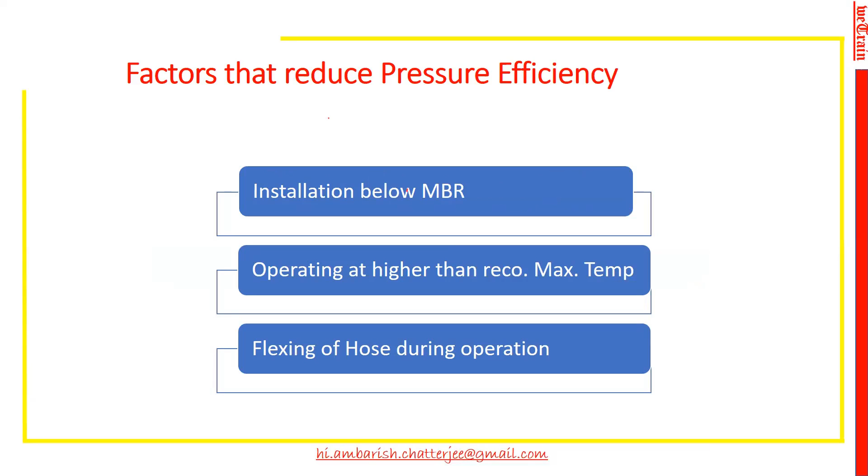So next, what is the time right now? We are running out of time. These are not going to be useful for you. There's another thing called pressure efficiency and hose derating. This we can take on a separate session when we talk to the hydraulic circuit designer of your company, who decides on the pressure efficiency of a hose, and derates the other hydraulic components. Hoses are also derated, mainly depending on the MBR, temperature, and flexing. So this we are not going to take up. We have other things also, which I think the time is not permitting at the moment. But just to show you this slide.

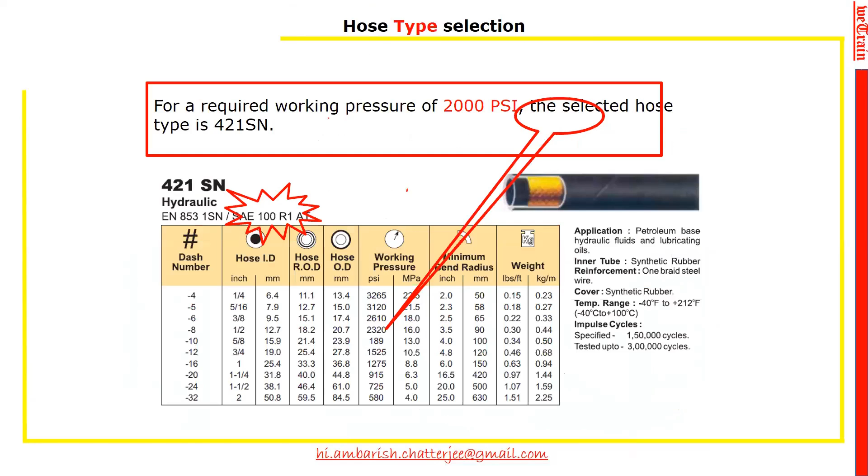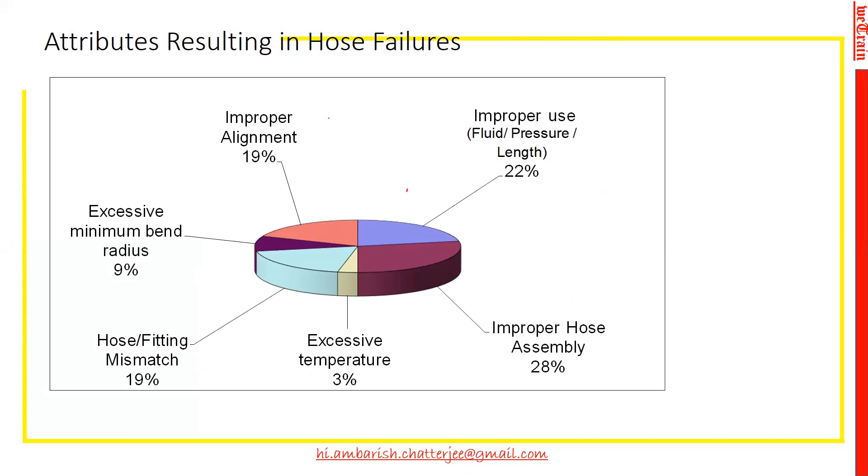The field failures which come to you must be once in a while, if not very frequently. They are mainly for these main reasons. One is the improper use, where the fluid is something else, or the pressures are different, or lengths. Lengths also take a very vital role. The failures, 22% of the failures can be attributed to improper selection.

In length, what I wanted to say, a hydraulic hose is allowed to shrink by 4% of its original length. Now if you are using a hose very tight between two ends, between two terminals, and if the hose shrinks by 4%, then you had it. So your fitting will come out of the hose, and you might have seen such failures reported from the field, which is basically due to inadequate length. So what we generally recommend is that the hose can shrink by 4%, or it can expand by 2% also.

If it expands, it's not going to really harm you. But if it shrinks by 4%, then there's all possibility that it comes out of the fitting. So we recommend a 5% additional length for any hose, provided it satisfies. If it is excess length, sometimes the kink may be there, the misalignment may be there.

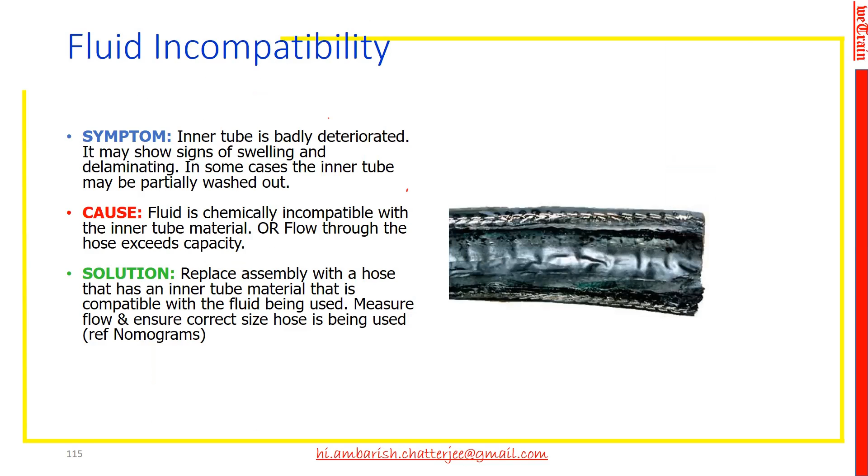About 19%. For excessive temperature, 3%, and for improper hose assembly, crimping, orientation, that contributes the most, that is 28%. So these are the reasons for hose failures. We have got a full chapter on how the failure can look, what are the remedies, what is the solution, symptom, cause, solution, but all these will take time. Proper installation is a very important thing.

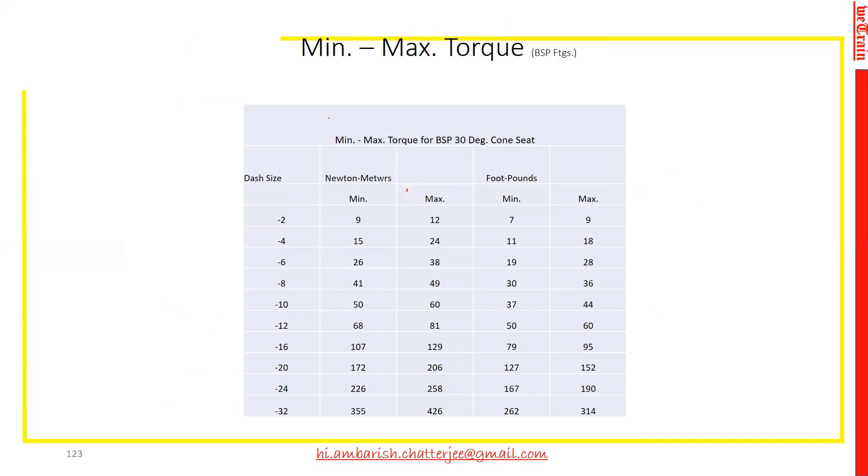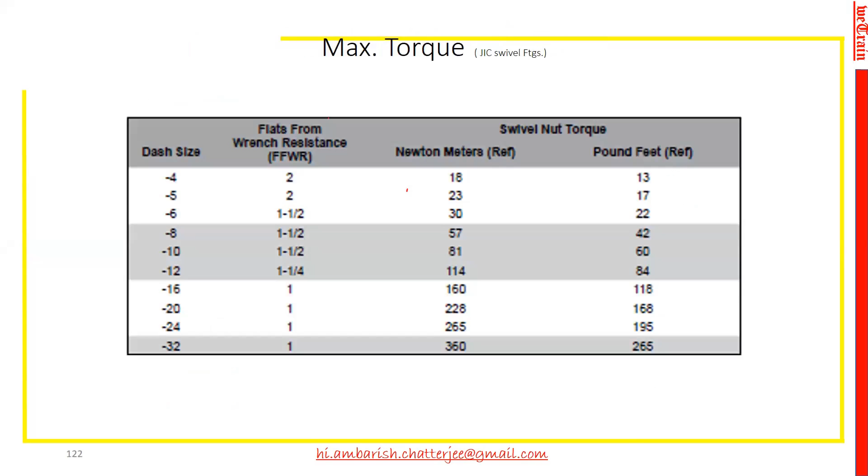This shows that your hose should come out at least 2 OD of the hose after your fitting, then only it should bend. So we have got a total routing for this. These are the torques for different fittings, like BSP fitting, the torque table is different. The JIC fitting torque table is different, and so on. So there are a lot of things which probably cannot be covered in this sort of small listing.

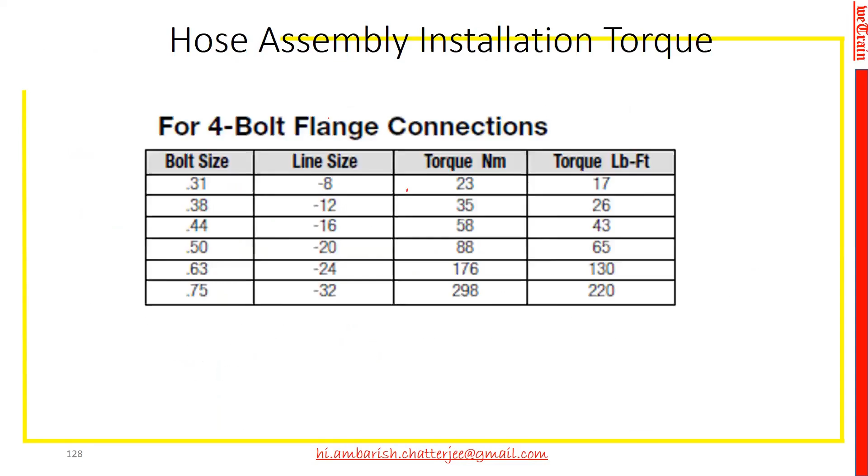Yeah, we'll do that, we have got that. Anup has made a very good slide for me which I could not include in this presentation, but here you see this should be taken care of.

One of the biggest things, as you read this, is if you twist the hose - this is very important for people who are installing. Sometimes they over-tighten it and install it in such a way that the hose is twisted. You can make out the level of the hose - if it goes in two different dimensions, two different levels, that means there's a twist in the hose, and as it is written, a twist of 7% can reduce its life by 90%. So you can be sure, if there is a twist, you can be sure of having a warranty return. That is for sure.

We have seen in many cases - I had been to many OEMs, which I cannot name, for their installation sign-offs - and we found out that most of the warranty failures are because of the twist. So we will give you a do's and don'ts, showing the correct way of installing it and the incorrect way of installing it, and you can take a leaf from that.

Point very well taken, sir. We would be very happy if you just share some slides showing this type of good practices or potential failures, so that we can share it down to the line to the operator level. We can have some OPL installed there, and that will act as a deterrent for the operators to understand and appreciate the routing as well as the twists which you have mentioned.

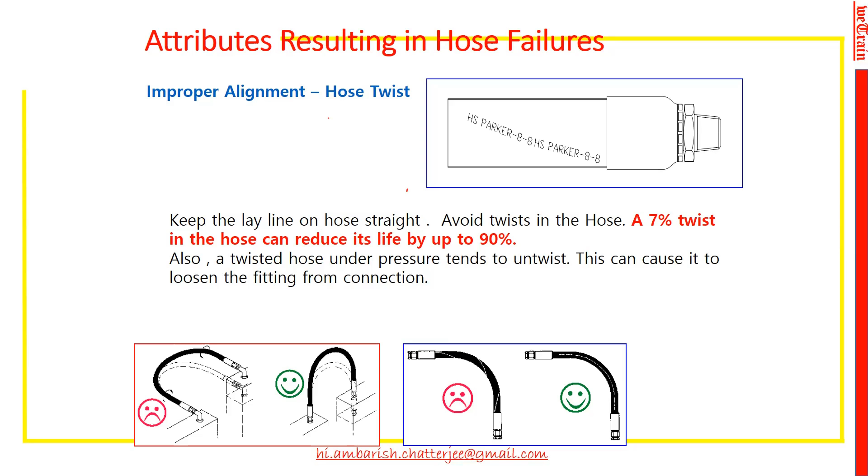The failures can be because of three major reasons - I don't have a slide right now here. One is the defect in the hose or fitting itself, which you cannot help, you've got a defective hose or fitting. The second is the wrong choice of hose and fitting, where you can have failures like this, which are compatibility problems or something like that - failures like this, which I can share with you, no issues. And the third is installation. In installation, there are two main reasons of installation failure.

One is the twist in the hose, and another is subjecting the hose below the minimum bend radius. These are the two things installation people should keep in mind. The moment you find you are bending the hose a little too much, if in doubt, you can use cardboard templates, which generally everyone does, to see whether they are overbent or not. So these are the main two reasons - number one is bend radius, bending it more than the bend radius, and another more prevalent one is the twist. And third, of course, is over-torquing - if you are using a torque wrench and those things, that is eliminated. But these are the three main reasons.

I will definitely share some of this. Sorry to interrupt - yes, Abhinandan sir, we can share a few slides on do's and don'ts while assembly and while bending. We can even help you with wherever you need double hexagonal fittings to avoid the twist, and all that we can share with you.

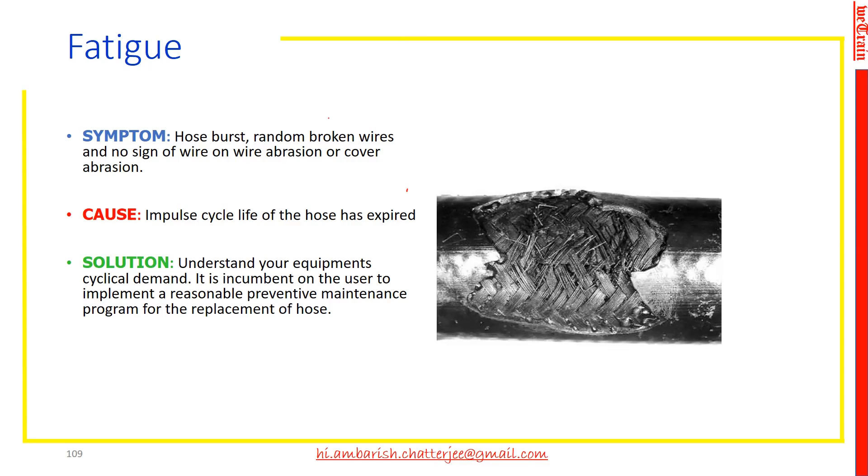Anything else? Carry on, Dada. No, I'm over, I'm through. It's 1.5 hours, I was told.

Abhinandan sir, can we conclude for the day? Yes, this training has been very well taken by all the participants, and I would like to personally thank each one of you for attending, as well as Ambarish sir and Anup sir for conducting this interview. We hope to have many such interviews and interactions in future. It would be very good if in future you could personally come down to Hyundai and conduct in-person training with us, which will be much more effective.

As I have already discussed with you earlier, sir, Ambarish sir, I hope you will be present here in Hyundai sometime soon, and we can take this further. Right, sir. Thanks a lot.

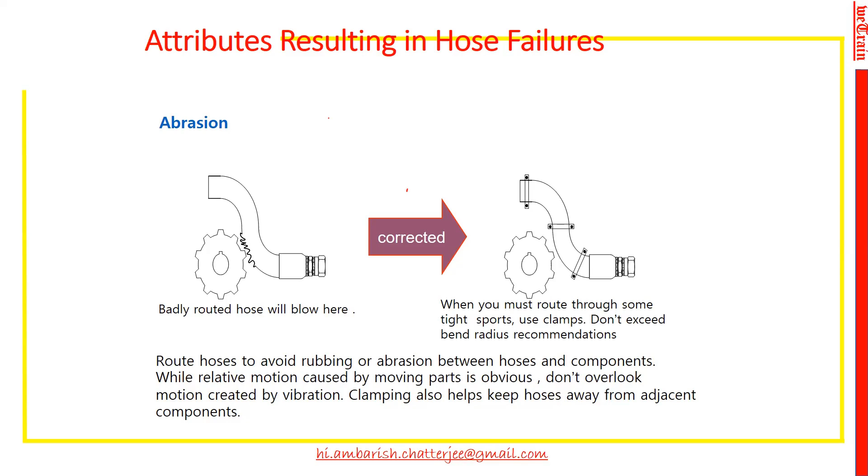Anup sir, I would request you to send us some modules, just topics, so we can take it further, have an internal discussion, and get the necessary approvals. That way we would be able to see you in person, and it will be very well taken, as sir rightly said, the requirement of the audience actually becomes evident.

Exactly, that's the point of the feedback form - let that also come from the guests, the delegates, so we can present something more expansive. Correct, so I hope this training has actually fructified very well.

Can we share the slides, or is it sole property of your organization? What is the policy about it? It's quite a bit of compilation, and all those things have gone into it. But if you require some relevant portion of the slides, I can definitely share those - like the numbers and those things. If you can just write down what slides you would like to have, we can send them to you.

So what we can do is have at least the hose routings and the hose fitting slides shared. Even a small presentation of slides will be very helpful. Anup, I think the one which you sent me, the made one, which I could not paste here, I should have.